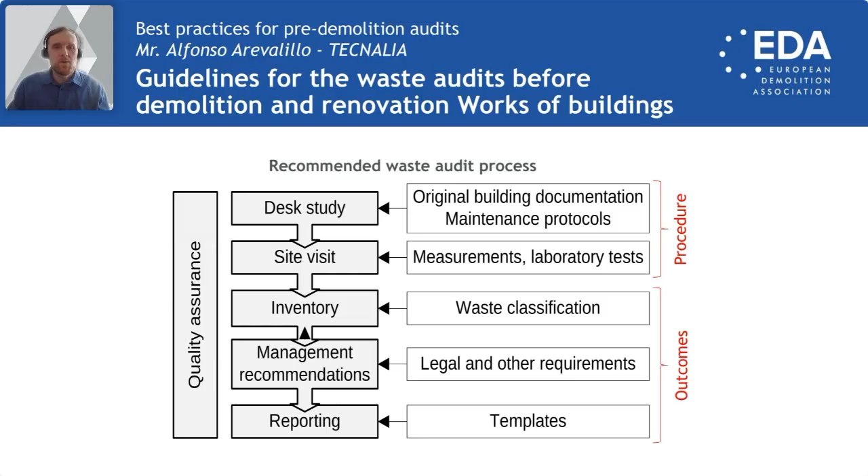Let's have a look at the desk study. It is usually recommended that you collect all the available information as much as possible from the authorities and also from the facility owner. Among the most important information is the age of the building - there might be different rules, for example for asbestos removal, depending on the age of the building. Then the design documentation is also very important, and all the records that can be obtained about different renovation works and alterations of the building.

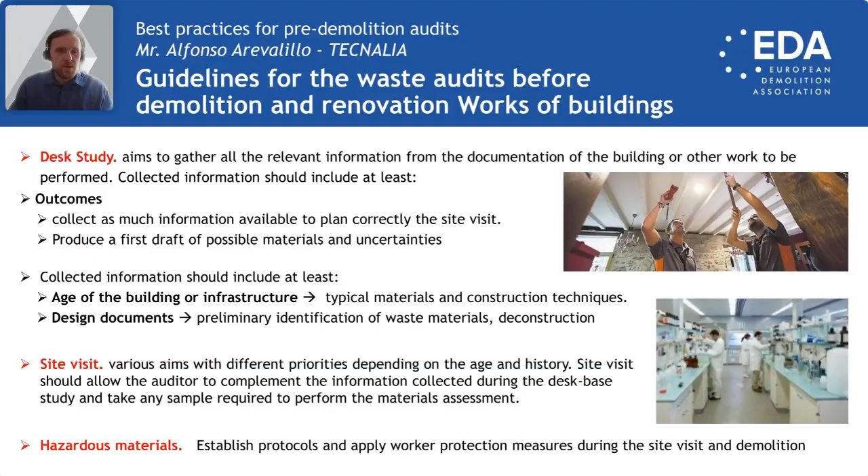This study is then followed by the site visit, which can be planned differently depending on the type of building or construction work being audited. Typically the collected study documentation is completed with photos and different sketches, and samples can be taken for laboratory testing - attention should be paid also to hazardous materials here.

The basic output is the inventory of materials and building elements that will be recovered or otherwise processed. In terms of waste, we don't always talk about waste - for example, if you have elements we would like to keep them as products, then we talk about waste prevention. This is very important, to map those kinds of components and products that will be used again and will not be managed as waste.

The guidelines provide a simple template for reporting of the audit, but in many countries this is already established practice and the templates exist nationally. So this is just a template to let you know what kind of information should be reported and is recommended.

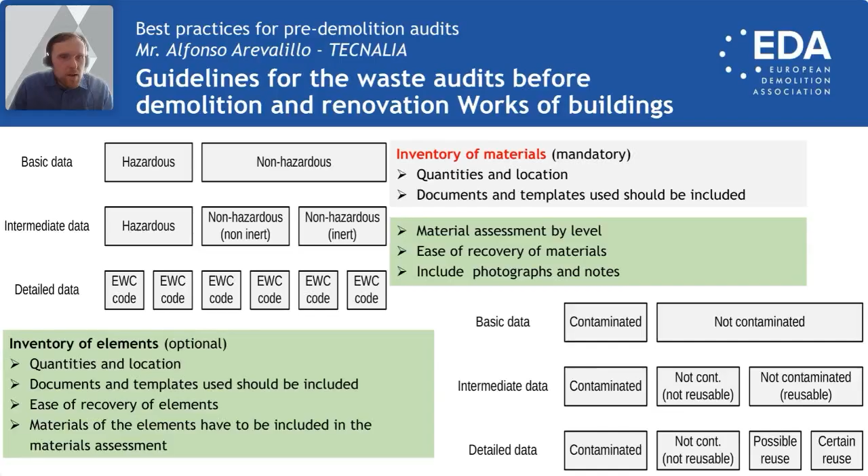With all the European waste catalog codes, in the inventory, here is again a short paragraph about waste management recommendations and quality assurance. It is mandatory to have at least comprehensive information on the auditor and traceability measures. Sorry again for the technical difficulties. I hope I was able at least to present the main core of the message in this presentation.

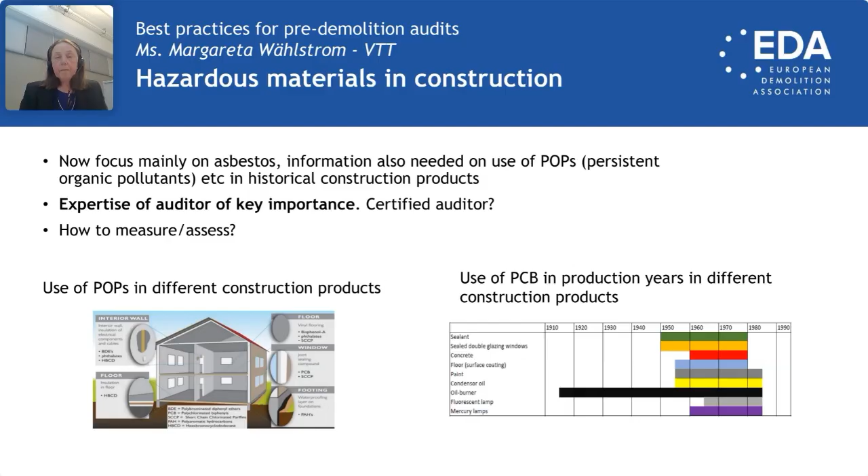When demolition is carried out, it's important to have information about the next step. What are the requirements on the materials to be recovered? What kind of impurities can be part of the materials? And what are the other technical requirements? The document focused on the mainstreams: concrete, wood, plastics, steels, etc., and listed the standards and examples of main applications.

And then we also saw that it is good to cover examples from the different stages of the life cycle, to present how important the information is when carrying out the pre-demolition audits.

In the project we learned several issues, and I will lift up two or three. We think the training for pre-demolition auditors must be given in the national language, and we also think there is a need for national guidance, because construction differs in materials used and type of legislation. We also think that in future more focus will be on reuse of materials, which will create new needs for information, especially traceability and CE marking of construction and demolition waste and products. Traceability and digitalization is something we will learn more about in future.

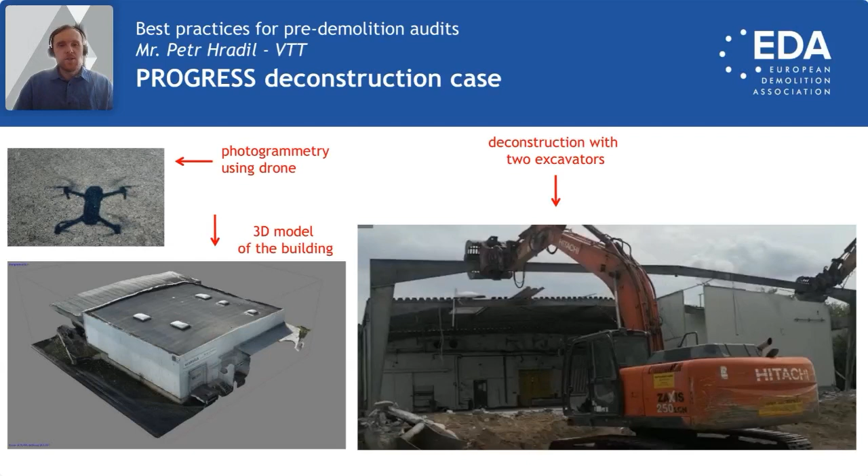So, okay, thank you for your attention. And if you have any questions, we can talk about it in the last part of this webinar.

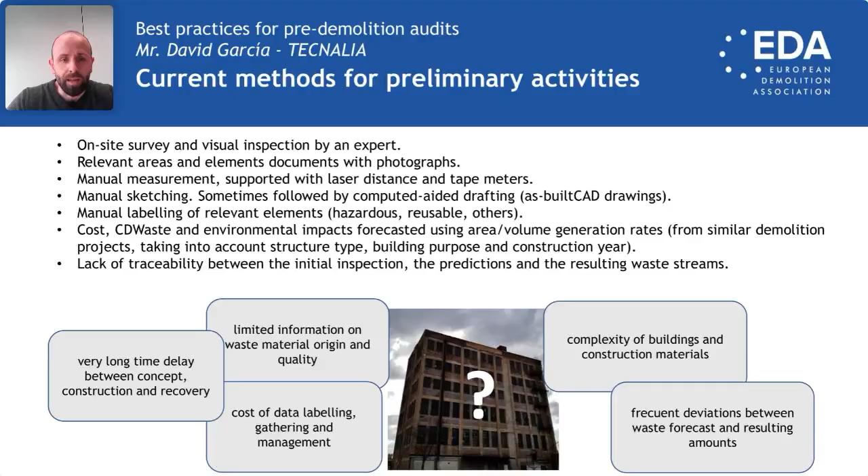When we try to get an estimation, a forecast about the cost and the generation of construction and demolition waste, or what will be the environmental impacts, we are still using traditional methods, taking into account generation rates based on preliminary projects. The conclusion is that we don't have good traceability between the initial survey, the materials and elements identified in the building, and the waste obtained after demolition. So there's a lot of opportunity to improve here.

Perhaps the most immediate technology is 3D scanning or laser scanning, using a laser light to measure the distance from the reader device to any object. We can get very accurate information about the internal and external surfaces of a building. This information is called point clouds. Once we integrate and manage those point clouds, we can define the elements inside the building and have a good enough BIM model to take decisions about how to proceed with the demolition.

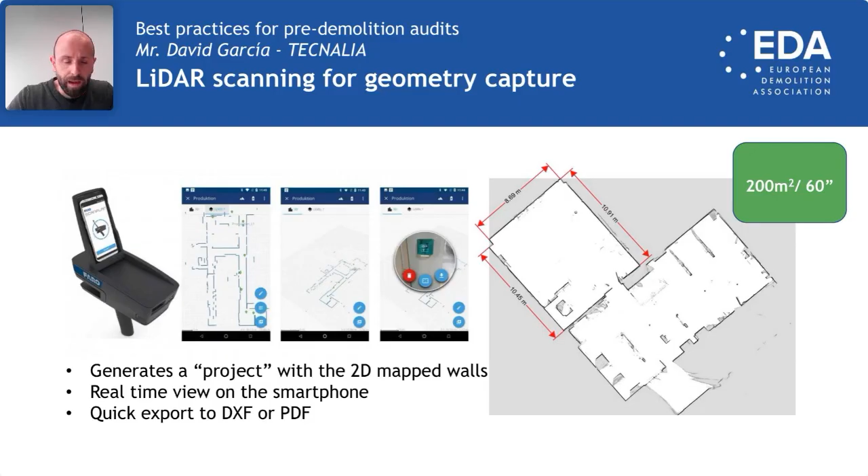Just to give you a rough number, at this moment we have devices in the market able to scan surfaces. For example, in this case we used this scanner to scan the surfaces of some premises in our facilities, and we were able to scan almost 200 square meters in 1 minute. So the time reduction is very significant compared to devices existing some years ago. I take this opportunity to encourage you to check the capabilities of devices existing in the market.

I have to be brief, but I will mention some of the solutions we are proposing in a European project called ICEBERG. It's a quite large project, we are almost at the end of the second year, and it contains several technologies classified into three different parts. The first is related to smart services and software to support pre-demolition activities and traceability before, during, and after demolition. I will focus the rest of the presentation on results from this first part. If you want more information, please check the website and feel free to contact me.

The first solution we are developing for pre-demolition audits is a BIM, building information model based tool for quick modeling and demolition planning. We know there are commercial software solutions in the market aimed at modeling buildings for design, construction, and maintenance purposes. They are absolutely okay, but sometimes the time and effort necessary for modeling a building that will be demolished in a few days or weeks makes it unaffordable, and demolition contractors think it's not a valid solution for them.

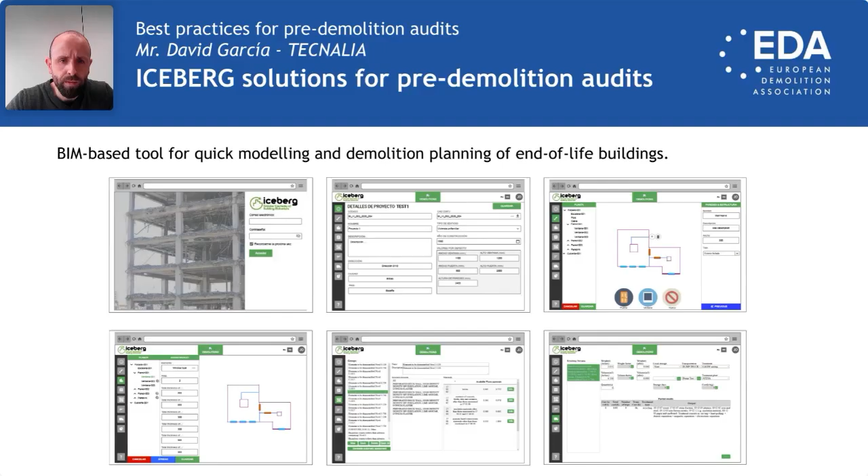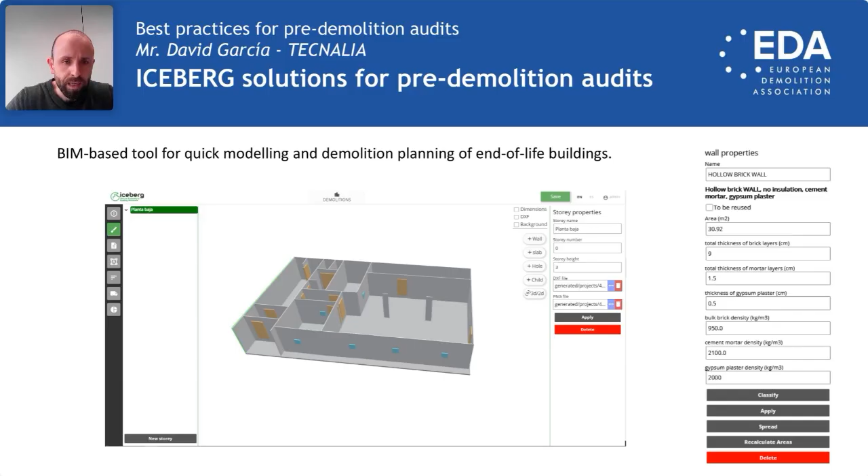So we are developing a tool consisting of a configurator in which we can use an existing point cloud, 2D drawing, or a basic CAD file to generate a simplified model of the building and inventory the main elements. We can inventory all the vertical elements very quickly and add additional elements easily. Once all elements have been inventoried, we can use the same model for planning the building - categorizing elements, defining different groups, the different demolition operations that will be performed, and the different alternatives and processes. Depending on the selectivity level, we can decide how selectively we will release the different materials from the building.

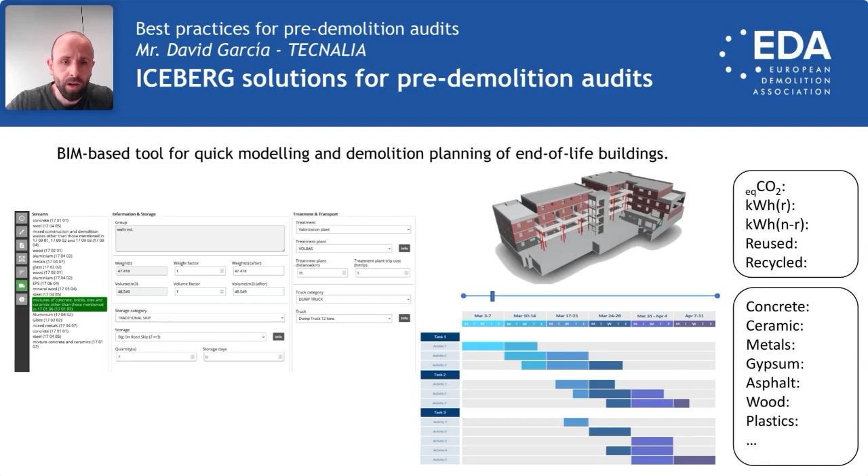Depending on those decisions, in this box we select the processes. We can also indicate the equipment, tools, and human resources necessary for that specific activity. Depending on this data, we obtain different results, more segregated or more mixed waste streams. This can be used by demolition contractors to plan demolition projects and generate different demolition alternatives. When all this information is in the tool, we can also generate accurate estimations about environmental impacts, for example equivalent CO2 or energy consumption, a visual representation in the 4th dimension of the demolition project, and the Gantt chart of the demolition activity.

Another technology will be the use of RFID tags for identification of certain elements. We have already validated some types of tags to be installed in certain elements, especially reusable elements, to increase identification and the guarantee of the element we are talking about. We are even demonstrating that those RFID tags can be used for tracing and tracking recycled materials like recycled concrete aggregates.

Finally, to conclude my presentation, we are also developing a cloud traceability platform using blockchain technology, which is relevant to ensure and increase the trustability of those platforms and the information related to pre-demolition and demolition activities. The idea is to get a better connection from the initial calculation with the identification of those materials to the resulting waste streams, with the final objective of increasing the market acceptability of the resulting recycled materials and secondary raw materials.

How do we take into account the use of demolition waste in this assessment? Well, the first step is the same, no matter if it is an innovative product or a product with demolition waste: a deep analysis of the essential characteristics relevant for the construction product and its intended use. These essential characteristics might differ slightly from those relevant for a traditional product, so we have to check other aspects, not only those checked for the traditional product.

Secondly, we define the test method with which the essential characteristics are to be assessed. And finally, the new product is assessed with these test methods. Of course, the performance has to be in line with that of traditional construction products for the same intended use.

It should be noted that it's not during the ETA development where the product has to be developed. This process should serve to confirm the performance achieved in a previous research and development process, one that should allow us to know how the intrinsic variability in the demolition waste affects the final performance of this new construction product.

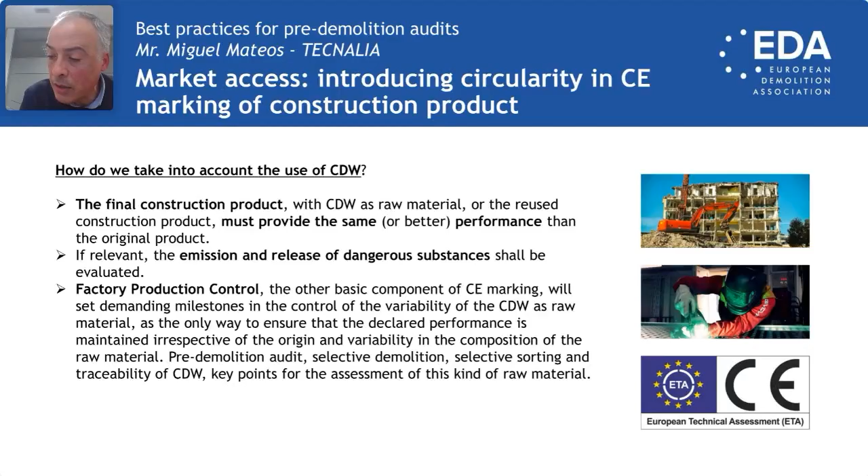Control of the raw material will be part of the mandatory factory production control. CE marking obliges manufacturers to maintain factory production control, and ETAs are not an exception. The aim is to ensure that the variability of the waste as a raw material stays within the margins identified in the development process, so that the final product complies with the performance declared in the ETA.

And this is where traceability linked to this whole process—the pre-demolition audit, the selective demolition, the selective sorting, and maybe the certification of the origin and composition of the waste—comes in. These processes are key to ensure the performance of the final product.